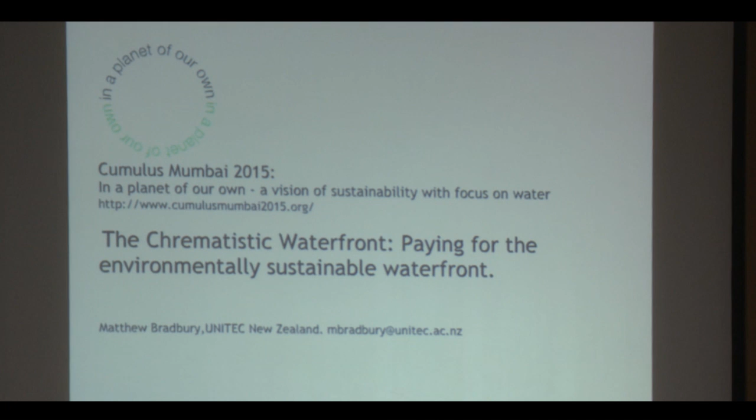Since probably none of you speak ancient Greek as your first language, I better explain: chrematistic basically means the art of getting rich. So this is about paying for environmentally sustainable waterfront, instead of using the typical developer's model, using a slightly different model.

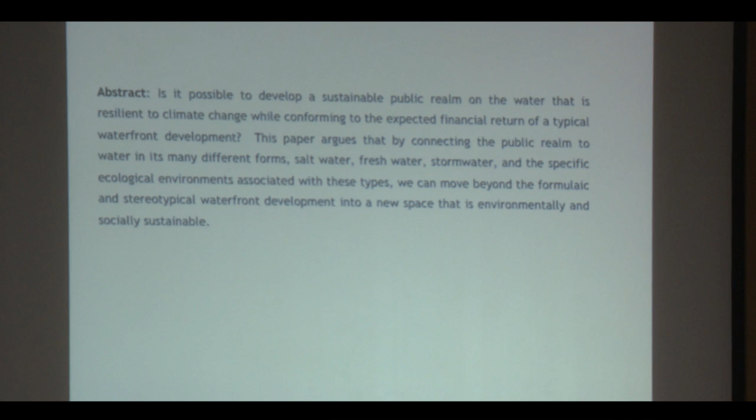The abstract: Is it possible to develop a sustainable public realm on the water that is resilient to climate change while conforming to the expected financial return of a typical waterfront development? This paper argues that by connecting the public realm to the water in its many different forms—saltwater, freshwater, stormwater—and the specific ecological environments associated with these types, we can move beyond the formulaic and stereotypical waterfront development into a new space.

Wynyard Quarter is situated to the west of predominantly the city centre, although the city is actually moving westward, which is quite interesting.

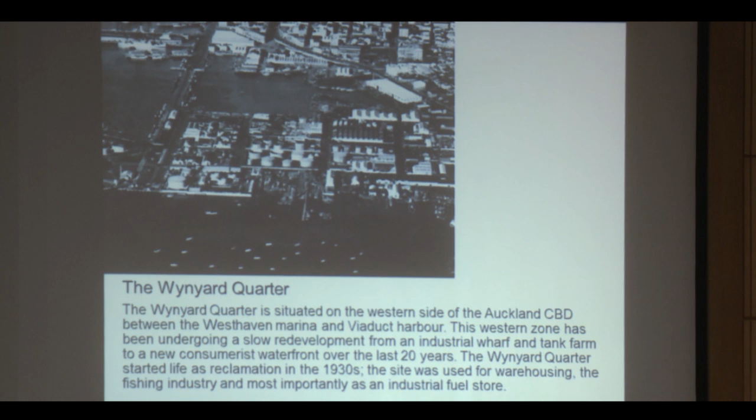This zone underwent a quite slow but long redevelopment, because in the 1930s they put what we call silos—basically oil refinery tanks which hold oil—and you can see them on the image, banded across the site. It was used for warehousing and the fishery industry, but mostly for storing fuel.

This is the city centre and Wynyard Quarter, and the hills in the far area are the Coromandel, which protects us from bad tsunamis, which is fantastic for us.

This particular area had a master plan commissioned in 2003 by Peter Walker, an American architect. What he was trying to do was connect two axes from the city centre to join the main peninsula, then joining back west and east basically to the city centre.

Wynyard Quarter is approximately 39 hectares. About 6 hectares are going to remain as existing marine industries, and the development site is approximately 21 hectares.

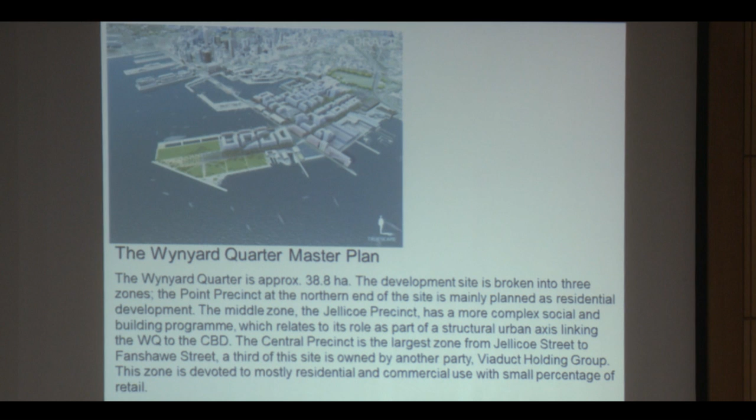The north end will be considered residential. The middle is going to have a complex social program, and this is basically our building control.

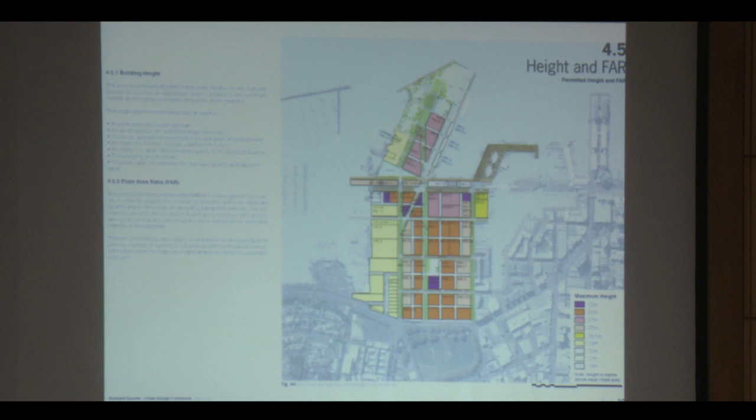The bad contaminated soil has been taken away, an impermeable membrane has been put over, and then they've grassed it. But the impermeable membrane is only 200 millimetres, which is not very high, so that causes quite some problems.

Auckland has won various waterfront awards for this area, and so this particular project is thinking about how we can build better and build smarter using water.

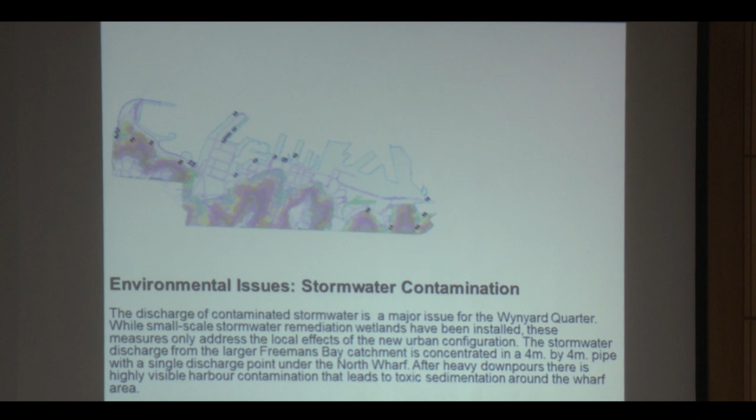We have a lot of issues with stormwater contamination in this area because a lot of it was reclaimed. Where you see the contour map and all of the pink, most of that area is reclaimed land.

So we have an issue because with sea level rising, we're expecting about 1 metre above the mean high tide currently. Currently the stormwater drains are only 1 metre below this reclaimed land, so of course we have a major issue because they're going to backfill, causing a lot of problems with discharge of contaminated stormwater.

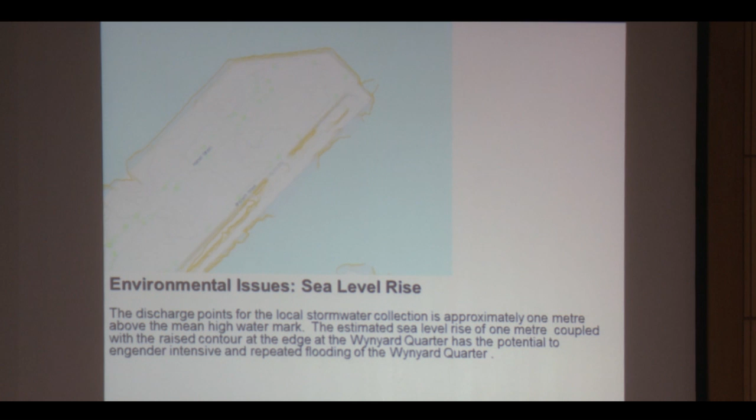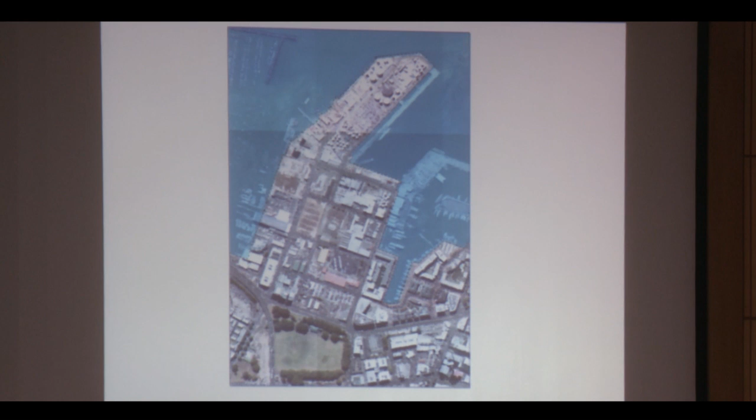So with the sea level rise anticipated for Auckland, this image shows the contour map and the estimated sea level rise of 1 metre, coupled with the flooding which exists in Wynyard Quarter. Currently, the site is heavily populated with impervious surface, about 72% concrete, and only about 27% of land which is permeable, which is a huge problem.

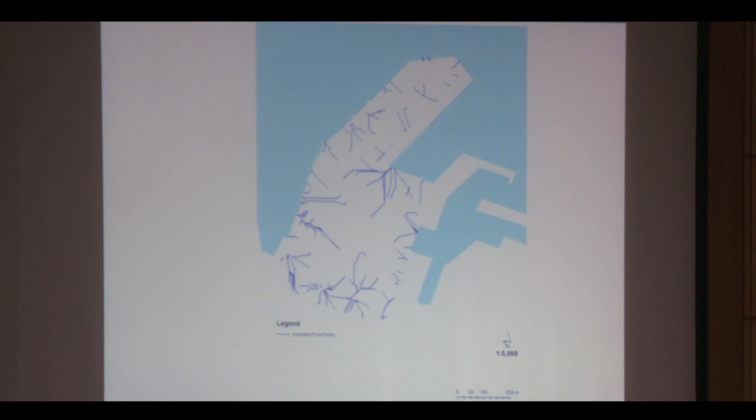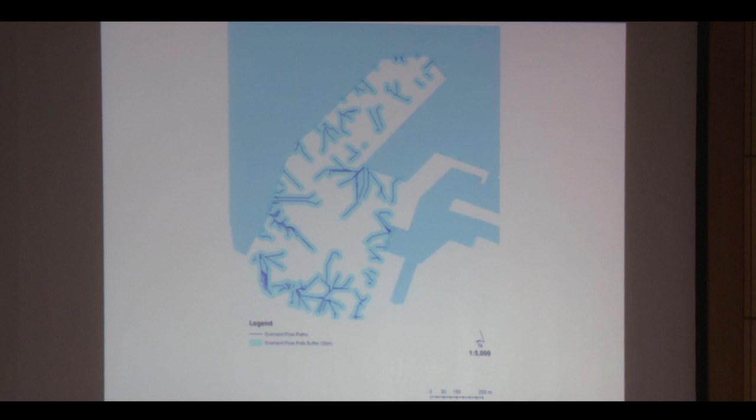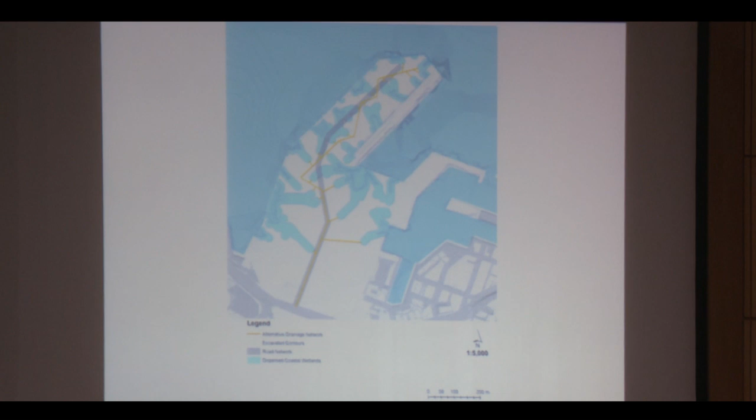This image shows the overland flow paths of the current runoff of water from this area. If we map that and think about using it as a resource for wetlands, if we were to dig down about 1.5 metres around these existing watercourses, where this light blue is, we'd be cutting into the landfill there and creating a wetland area. So this is how it would look. The line through the middle is the stormwater needed, mapped against the larger areas taken out as wetland areas.

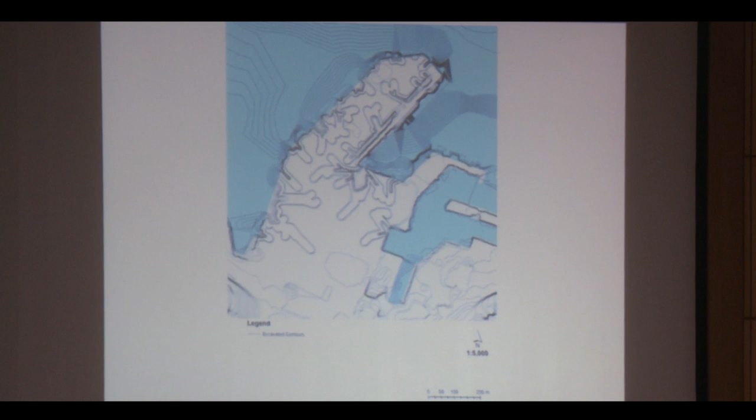So the resulting wetlands would mean taking out around 116,000 cubic metres of soil. We would then use that soil to raise up the area not in that blue zone to make it higher, and the developers would build on that elevated platform. This is another contour map - the green area here could be the potential developer's area.

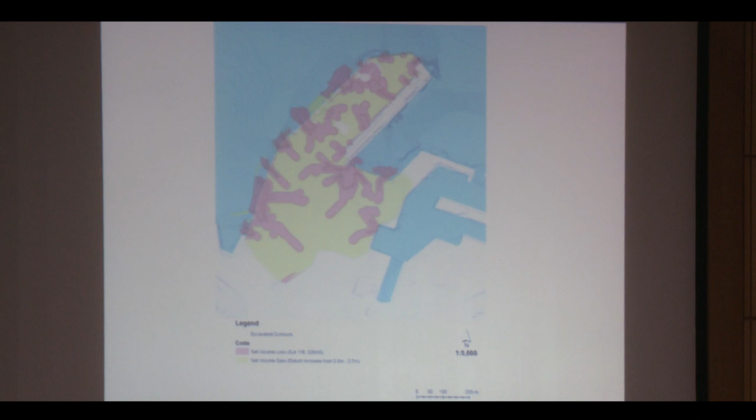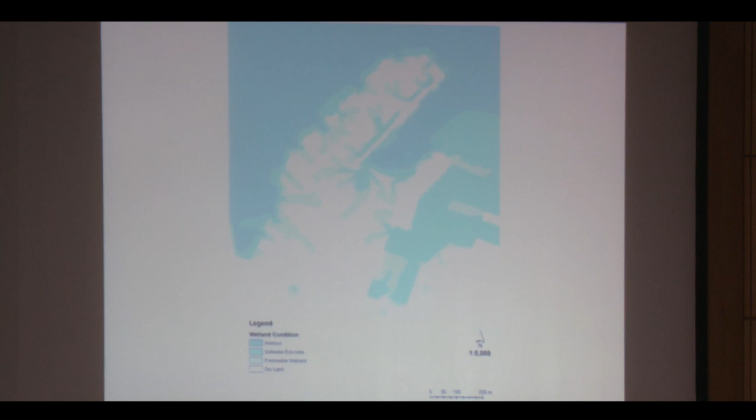This shows the difference between the harbour, which is dark blue saltwater, the medium blue which is also saltwater, the lighter blue which is freshwater, and of course the dry land. This particular downtown area, in the middle of the spot, is quite far away from other areas that have green spaces.

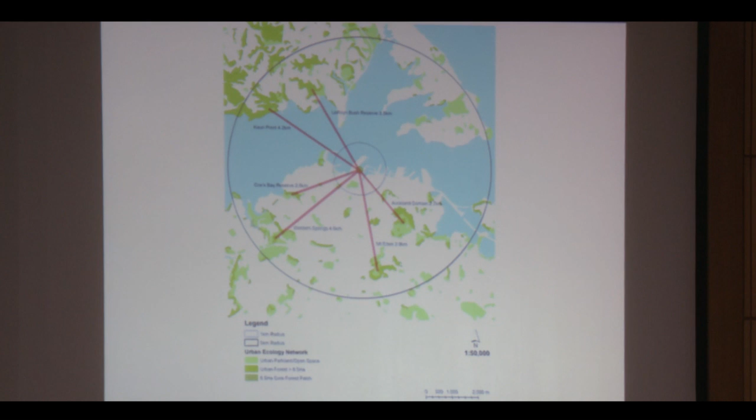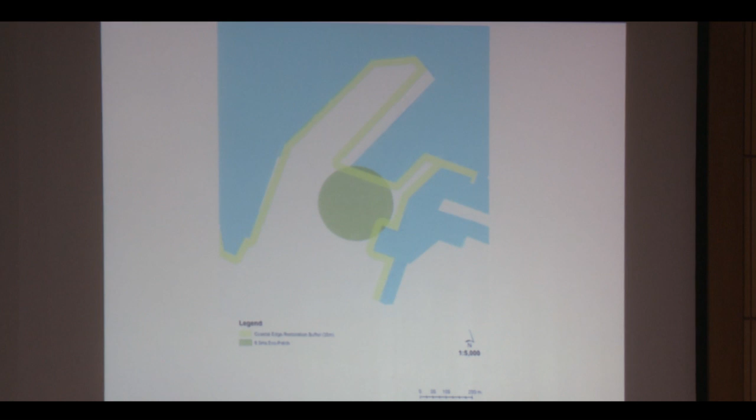So the anticipated project would have what Matthew is calling an eco patch - basically a regenerated area using New Zealand natives, planted with New Zealand native species.

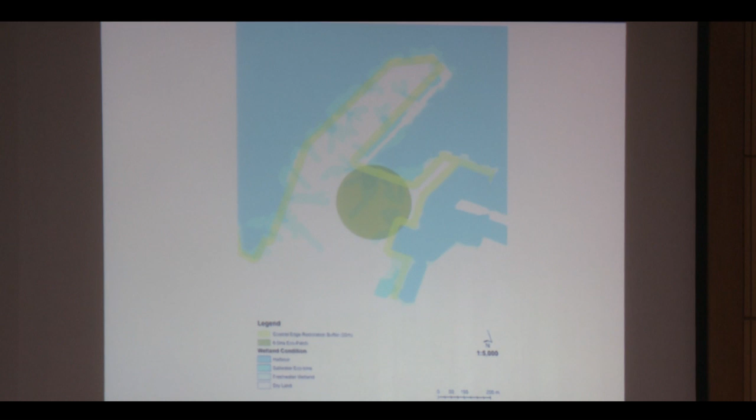It would need a buffer zone of about 30 metres to prevent any further watercourse sea level rising. Once this is all mapped together, the large green line is the buffer zone, the pale blue is the area cut down to let the wetlands come in, and the darker green spot would be a regeneration forest in the area. Then it's mapped with the large drainage.

And you get this area here, which is quite interesting because the dark grey is the area the developers would build on. Bearing in mind the soil is now raised up nearly 3.7 metres, they can go relatively high - up to 51 metres. So this means the developers can put in quite a reasonable sized building.

So in total, the amount of money in New Zealand dollars to cost through this remediation - getting rid of the contaminated soil, getting rid of the silos, putting in the new park, various things - would be 43 million New Zealand dollars. A relatively large amount of money.

But Matthew works on this kind of way of conceptualising developers' money by using the concept of Vancouverism. Vancouverism uses GFA, or gross floor area, and is a new way of city living. It has a deep respect for nature with enthusiastic, busy, engaging, active streets and a dynamic urban life. Its typology is very tall, slim towers for density, wide separated buildings for light, air and views, and parks, walkways, spaces, and great urban transportation.

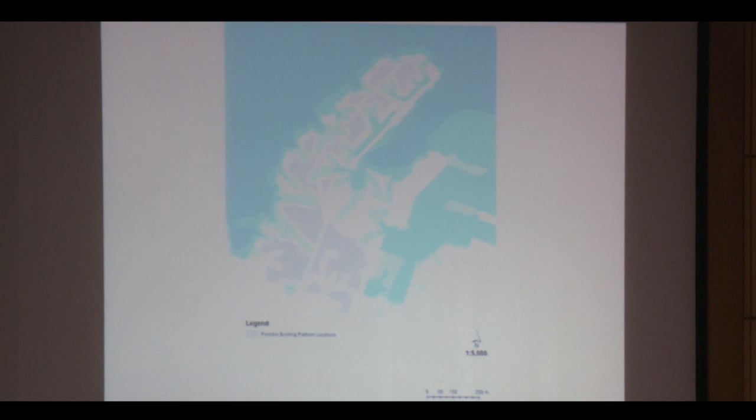So this is how it would look, mapped with the greater Auckland context. The dark green and dark grey areas would be where the developer would build. If you want to read the paper, honestly, it goes into such mathematical detail - I'm not going to cover it because it's way too complicated.

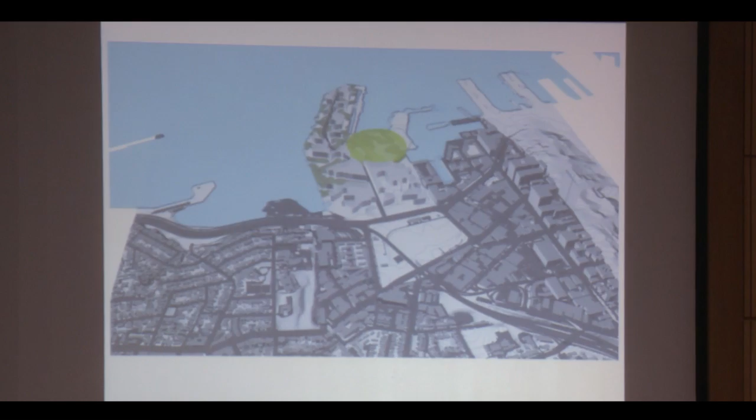So this would be the areas extruded up with the potential for being built on, and mathematically it works out that to do this - to create a park, create wetlands, have salt water and a whole range of different water systems - they still have the same floor area, and it can be done, and the developers still make money, which is fantastic.

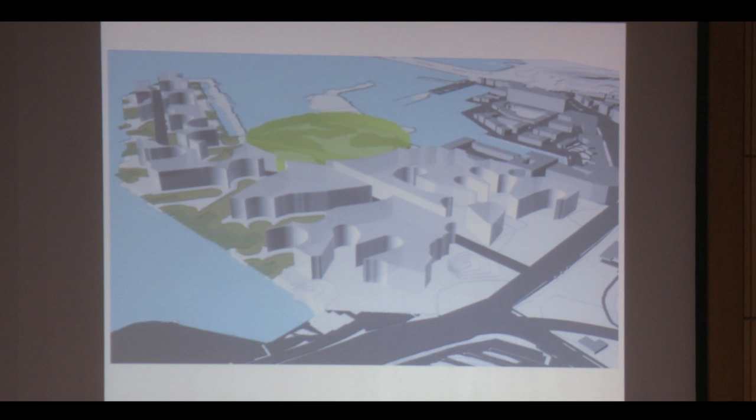So the last couple of slides are the areas extruded, but if this project was done in this way and not in the way the master plan was done, we would be able to achieve a carefully crafted, vibrant waterfront development which attempts to mediate the developer's imperative of making money over the ability to have a vibrant, livable city, and in that way we could truly create a chromatic waterfront. Thank you.